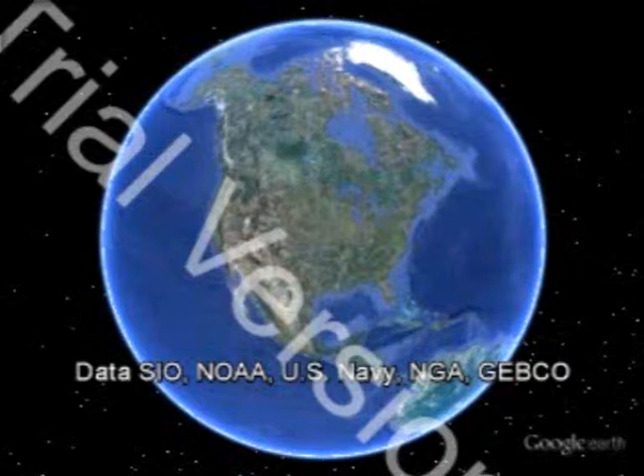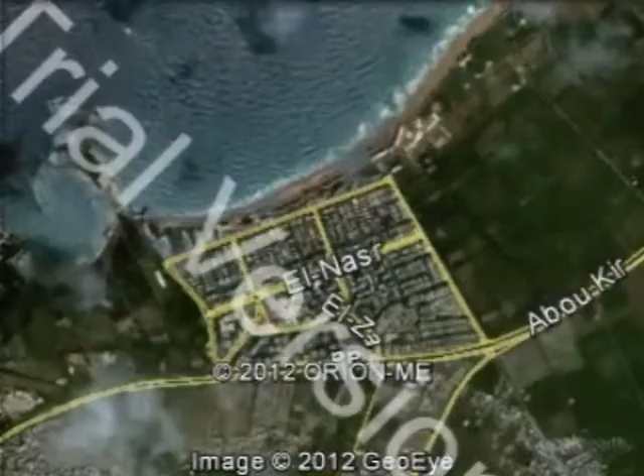The following is a design proposal to turn Maamoura community into a sustainable community. Maamoura is located in Alexandria, Egypt, and the proposal is trying to consider some issues of sustainability, which responds to the necessity to build a city generating its own economy and using green technology and integrating resource-like elements that provoke minimum impact on the surrounding.

This will be done using the 3 pillars of sustainability, which are the social, economic, and environmental sustainability. The city will encourage people to walk instead of driving and give facilities for recycling and optimizing the use of green technology, turning Maamoura into a sustainable, zero-carbon digital city which encourages a knowledge society.

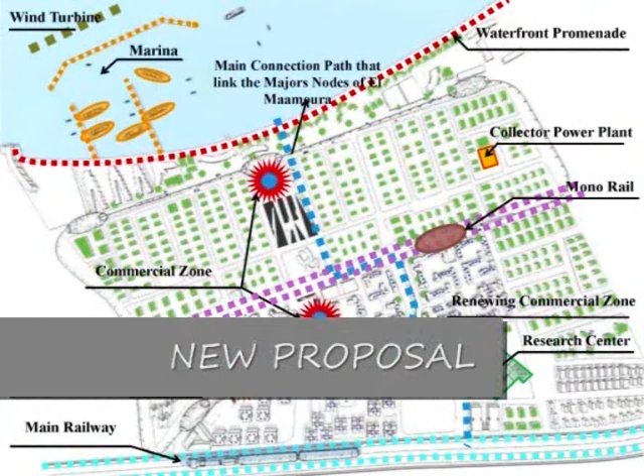This will be done using 7 main principles of sustainability under the categories of the LEED, which are the community layout, buildings, transport, energy, water, waste, and materials, to turn the old proposal and master plan of Maamoura into a new proposal which encourages a pedestrian-friendly community.

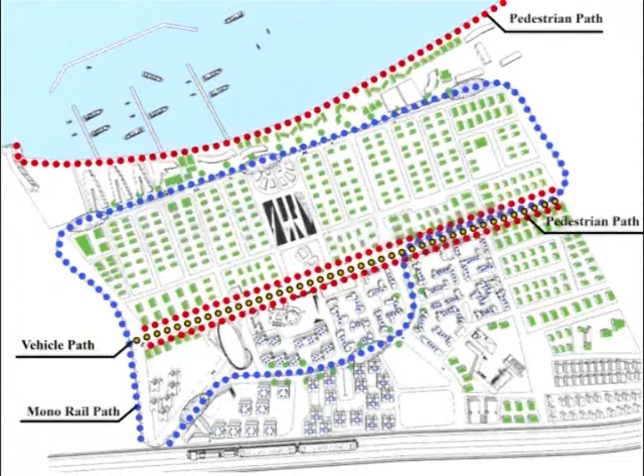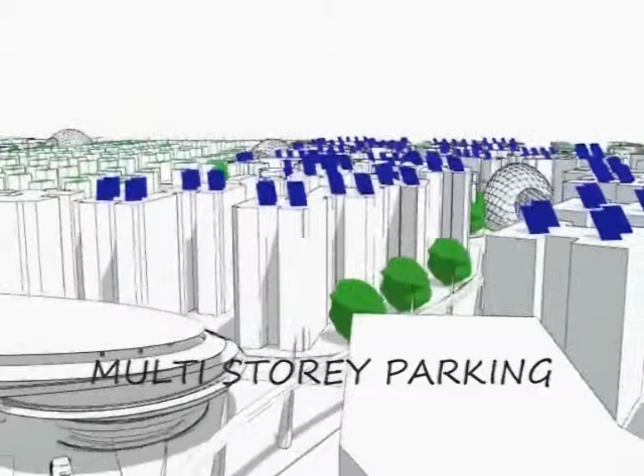The proposal depends on using the main train which is in front of Maamoura and connecting it with a monorail. The passengers either enter Maamoura by cars and park them in the multi-story parking, or use the monorail or eco cars.

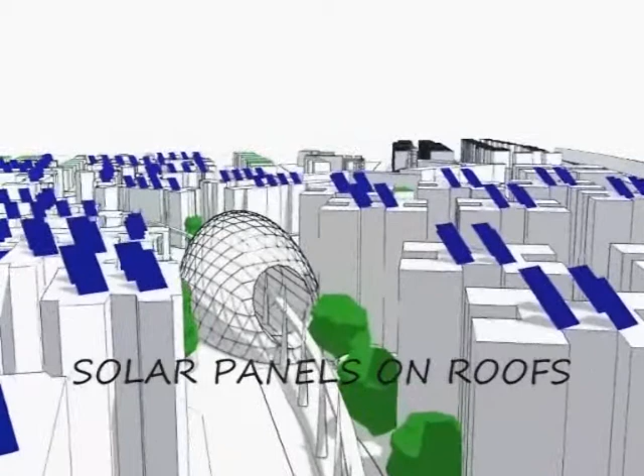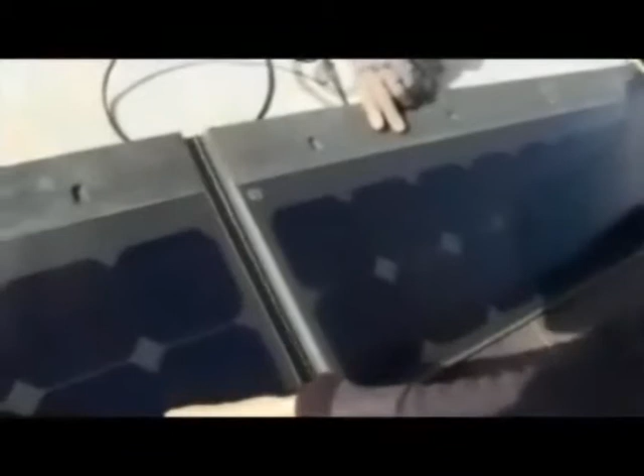Buildings are roofed by solar panels or green roofs. The solar panels help in reducing the consumption of energy by buildings, because they produce energy which can be used and consumed by the building.

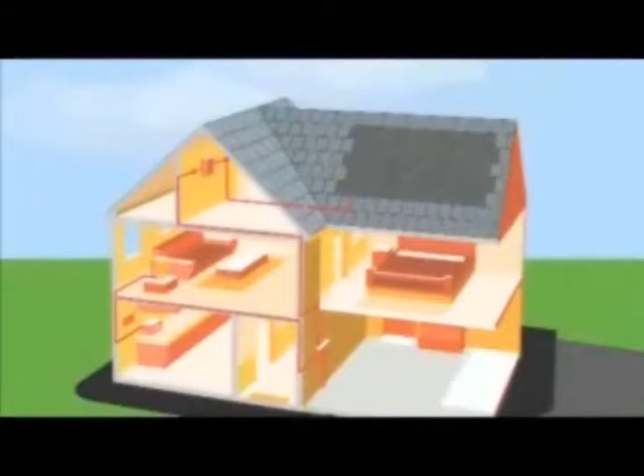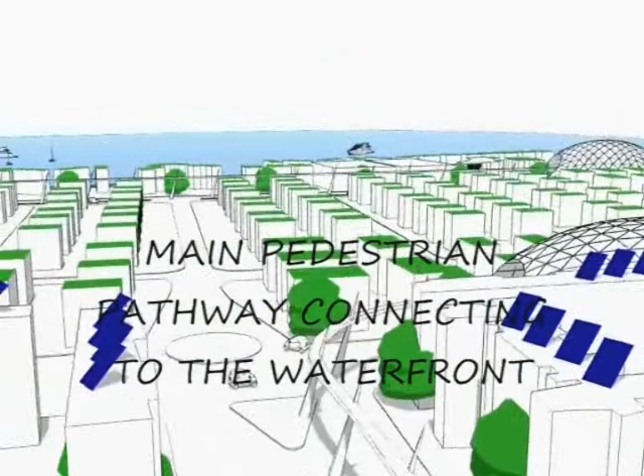Afterwards, as we walk through, there are monorail stations in important commercial nodes. These stations connect the commercial nodes of Maamoura, which encourages tourism and helps increase the economy of the place, underneath which most of the streets are left for pedestrian streets.

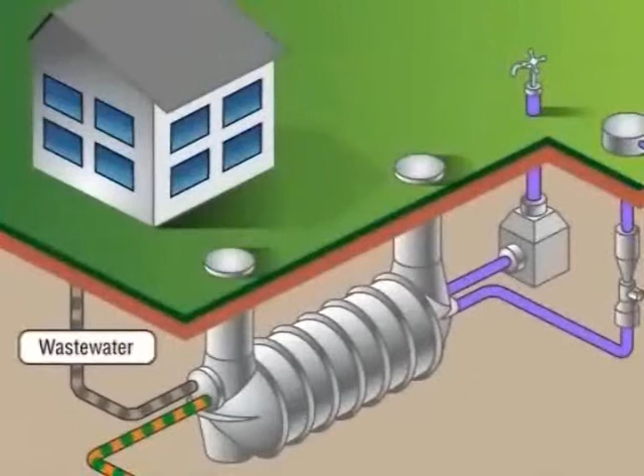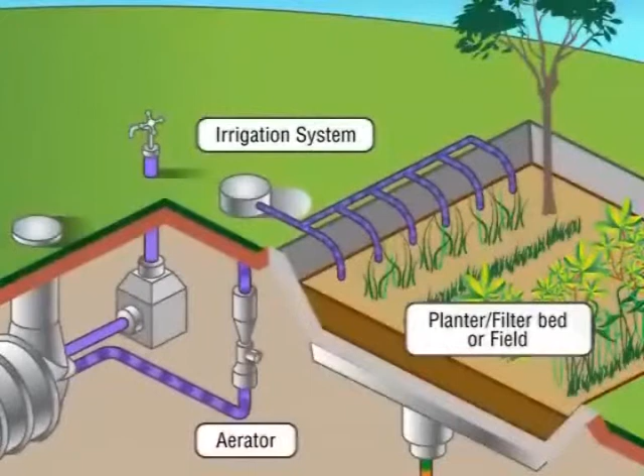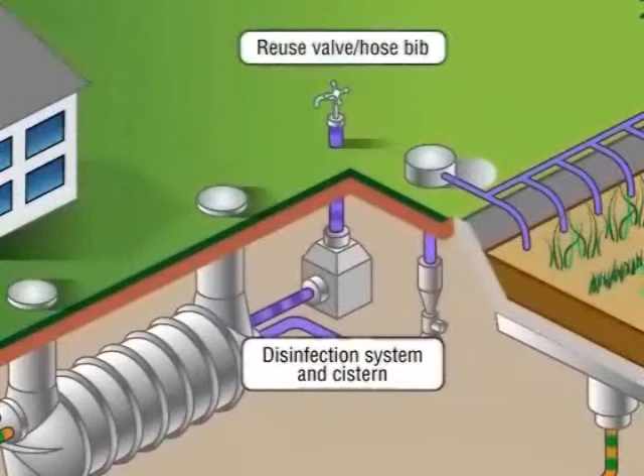Excess rainwater or wastewater of buildings is collected in a collector or a cistern, where water is treated and afterwards used for irrigation, thus reducing the consumption of water in irrigation, because there is a high quantity of water consumed in irrigation, and by this we are offering another way of irrigating the agricultural lands or the green areas in Maamoura.

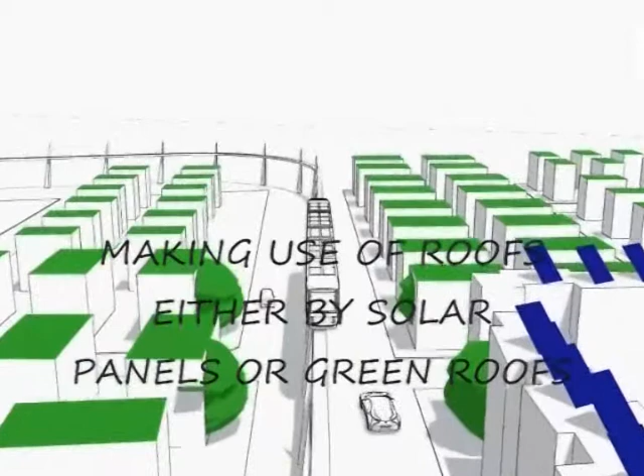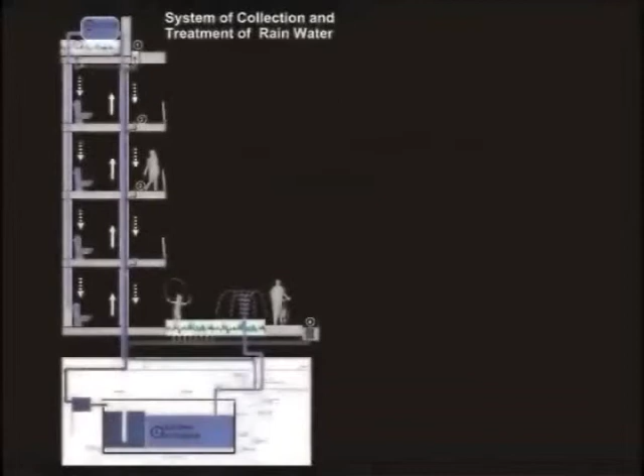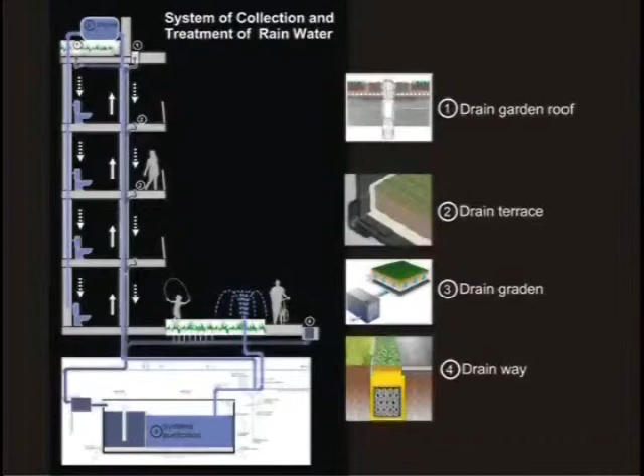Other ways, the roofs are green roofs, and by this we can also use the excess water of the green roofs by making a water management plan for them. This can be done by collecting the water in a collector underneath the building and then reusing it in irrigation, which is another solution for irrigating the green areas in Maamoura. This is a way of a water management plan.

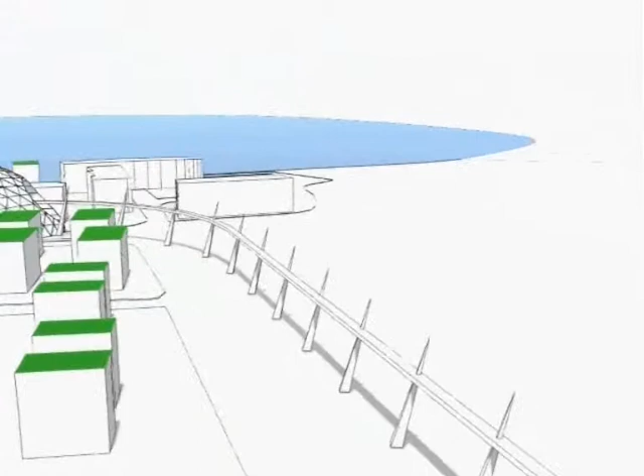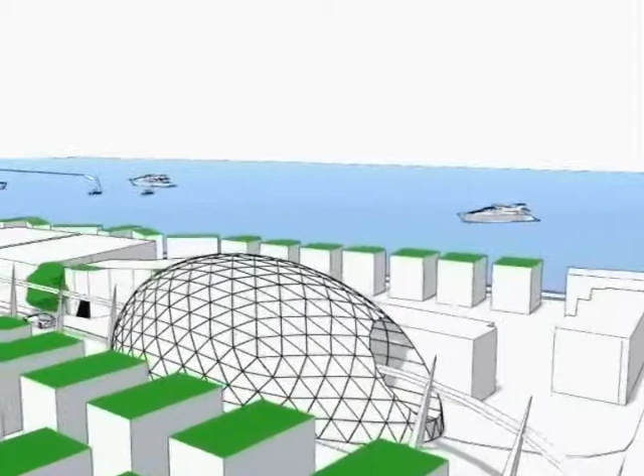As we walk through the agriculture, we can make use of the agricultural lands beside Maamoura by a new agricultural research center, which can make a lot of research on the agricultural crops in Alexandria. We can also use the botanical gardens beside Maamoura as visits for tourists.

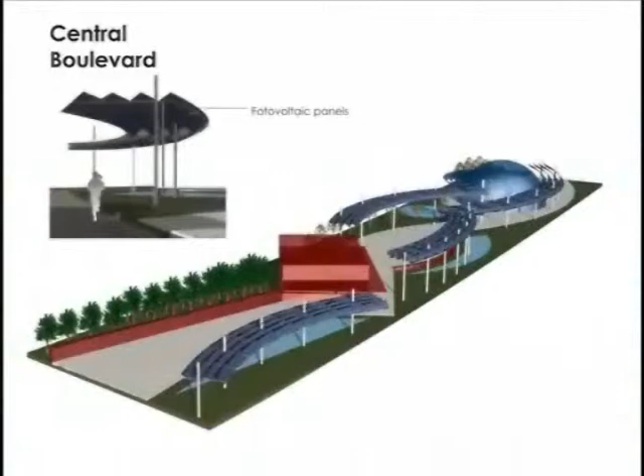As we walk through the main street before the waterfront, we can see that it is surrounded by pedestrian walkways which are shaded by photovoltaic panels, and the street lighting used is also energy independent lighting, because it is covered by solar cells which work in the morning, and at night this solar panel offers energy for the street lighting to light itself independently.

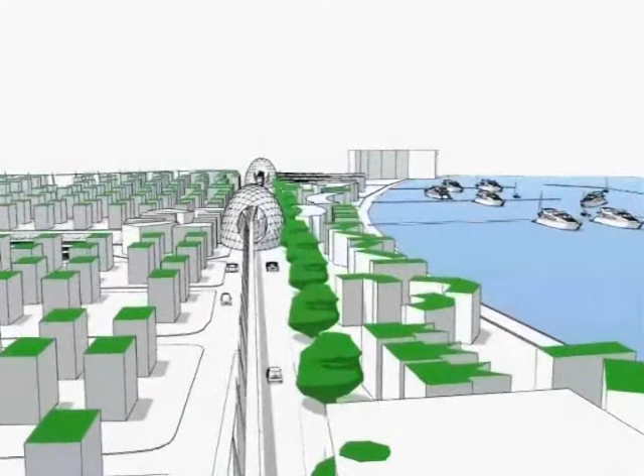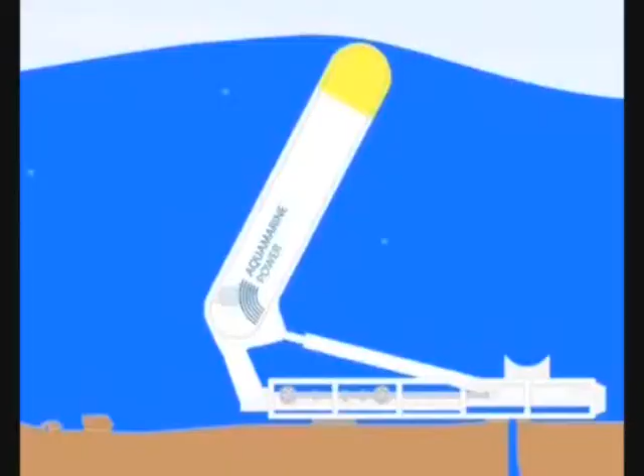Afterwards, as we walk through, there is another proposal for a marina. This is a marina proposal for another way of water transport, thus reducing the dependency on transport inside Maamoura. Also, this increases tourism, and there is another proposal for reducing energy consumption by water plants, either by wave energy or by tidal energy. This plant can either use wave energy or tidal energy to produce electricity.

By tidal energy, the moving of tides back and forth moves motors. These motors afterwards turn the kinetic energy into electricity, which is a way of producing energy from renewable sources that already exist.

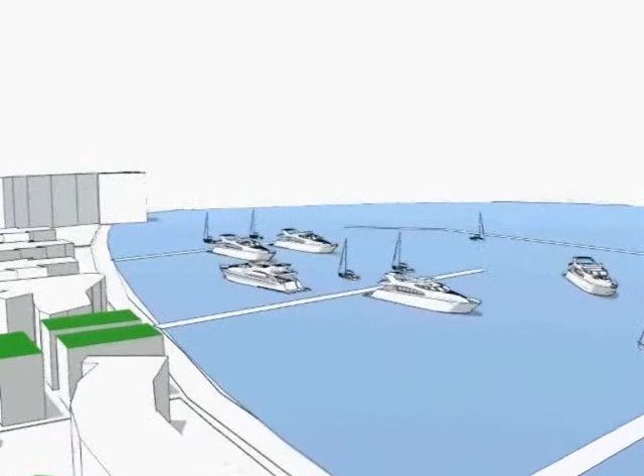There is another proposal of making use of renewable energy, which is from wind turbines. Building wind turbines in the deep sea will produce another form of energy. All these types of energy can be further collected in a power plant, which further distributes the energy around Maamoura buildings.

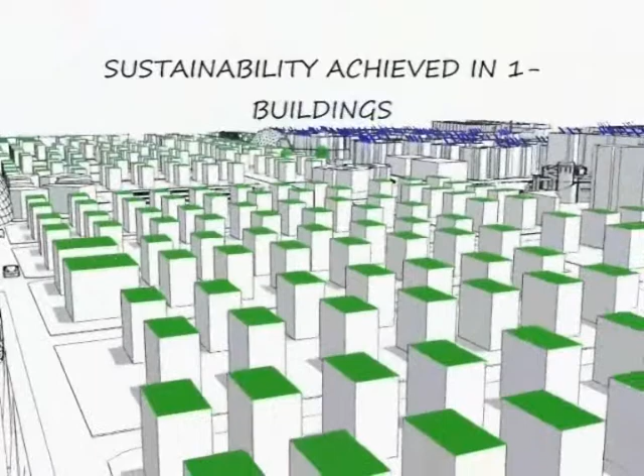Thus sustainability is achieved in buildings by reducing water consumption and energy consumption. Sustainability is achieved in transport by depending on economical and eco-friendly transport like monorails and eco cars. Sustainability is achieved in water by water management, and in waste by waste management.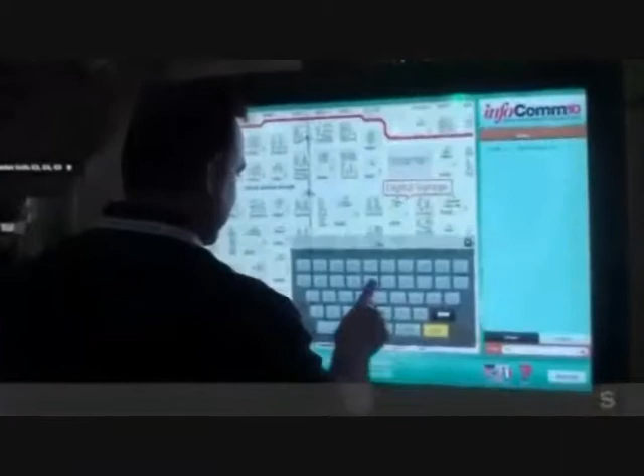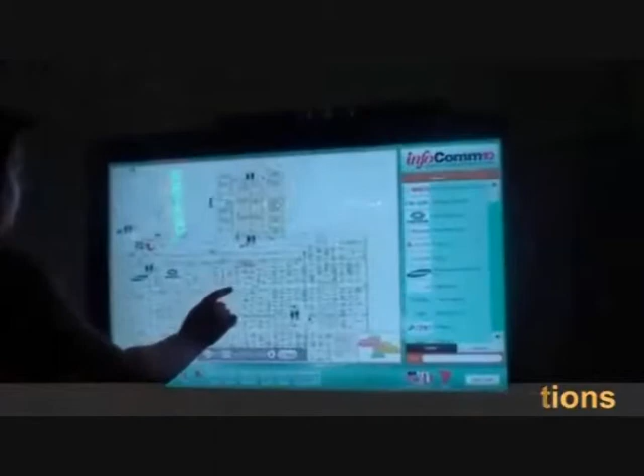We will encourage digitalism by using digital screens for advertisement or for wayfinding. Also, waste collection points with waste division and recycling to reach a zero waste, zero carbon and fossil fuel free Mamourah sustainable city.